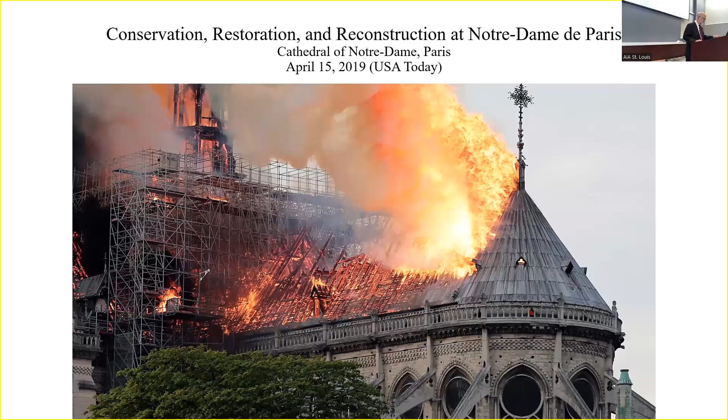Those who work in the field of restoration or rehabilitation of historic structures know that a building is at its most vulnerable precisely when there is construction work going on inside. To the danger of fire, we can add earthquake, flood, subsidence, structural failure, war, not to mention intentional demolition, adding those to the list of hazards faced by historic buildings. In many of these cases, the question of how or if the building should be repaired, restored, or reconstructed becomes difficult to answer quickly or simply.

In the case of Notre Dame, the damage at first appeared catastrophic, including the complete destruction of the medieval timber framing supporting the roof, a structure so dense it was called La Forêt, the forest. Its charred remains and those of the burned flèche or spire rained down into the nave of the cathedral through the partially collapsed vaults over the crossing.

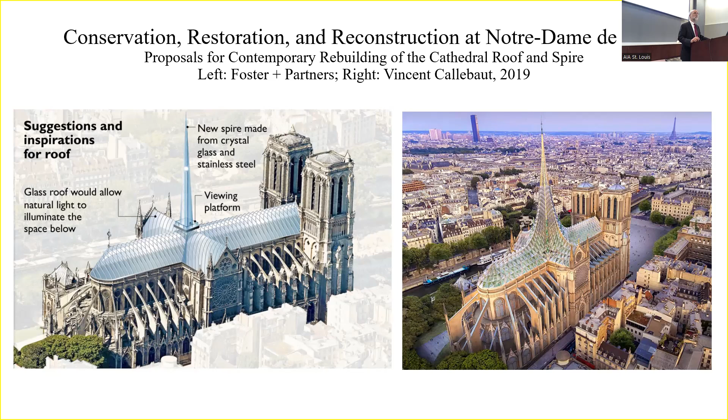But there were also other voices, such as those of Ronaldo Hernandez, Jacques Levet Jr., and René Salas, three former students at the University of Notre Dame, who proposed precisely what the contemporary architects claimed was impossible: reconstructing the timber roof of the cathedral, rebuilding its spire, and restoring the rest of the structure, constructing a temporary cathedral to house the religious activities while the work was going on, and at the same time, using the project as an opportunity to establish an expanded training program for craftsmen in timber, masonry, metalwork, glass, and other crafts and trades in need of recuperation.

These young designers maintained that the knowledge and skills needed to restore the cathedral existed and could be transmitted to others, and by this transmission could ensure the survival of both the physical artifact and the traditional crafts and trades that made our historic monuments possible and continue to maintain them today.

While that proposal remained on paper, another group, Professor Tonya Ohnstad's students at Catholic University of America, which she will talk about in a few minutes, went a step further, proving with their own hands that not only is the material needed to reconstruct the timber roof structure of the cathedral available, but the components of the old roof could be remade even by a team of architecture students under the guidance of trained and experienced timber framers. They proved that mainstream architects and conservation experts were wrong. Reconstruction of the timber roof of the cathedral was not only possible, it was within reach.

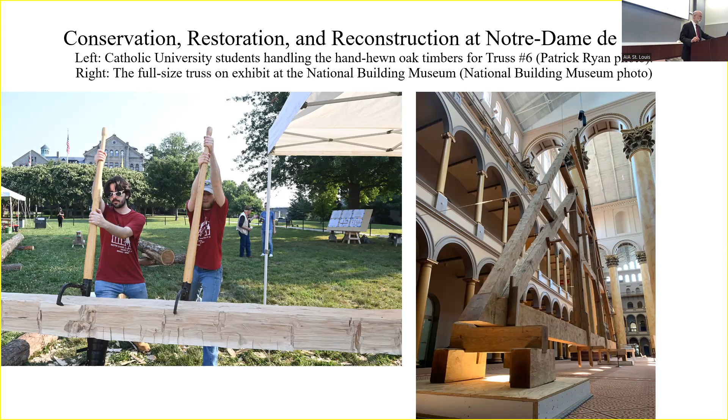Now, the French government is pursuing this alternative under the guidance of architects Philippe Villeneuve, Rémi Fromont, and their team. These two architects toured the United States at the end of September, and they spoke at both of our universities on successive nights. It was a tough schedule. Inspiring their audiences with their determination to restore the cathedral as it was, bolstered by the knowledge that they bring to the task. I believe this is one of the most hopeful things happening in the world today, which I think we can all agree could use more things to be hopeful about.

Perhaps we should not be so surprised that the means and the will are still available to restitute the cathedral as it was before the fire. For decades, international conservation pronouncements have called for the safeguarding of not only the physical artifacts of historic buildings, urban districts, and landscapes, but the knowledge, skills, and craftsmanship that made them possible, as well as their maintenance and preservation.

Comprehensive conservation of what we now call intangible heritage is the necessary antidote to the contemporary tendency to assume that only technological innovation can solve our present problems. On the contrary, both are needed, and their synergy is likely to be far more productive than either approach alone.

Contrary to conventional opinion, architectural craftsmanship and restoration skills have not disappeared, especially in France, where the traditional training and guild institutions established since the Middle Ages continue today in the Compagnonnage du Devoir, a national training program that follows the traditional path from apprentice to journeyman to master.

The craftspeople have always been there. We just need to identify and employ them and encourage them to train those who can follow them. If we do so, not only will we have the people we need, but more will join the cause when they see that such work is valued and supported.

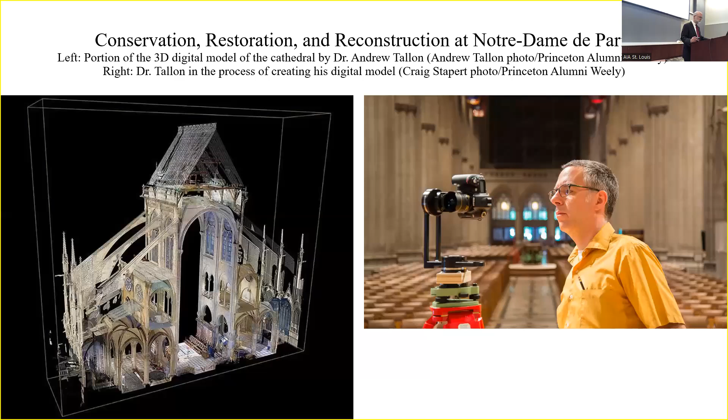As I mentioned, this is a project that demands both tradition and technology in equal measure. We need timber framers who can reproduce the forest of the roof structure, and masons who know how to cut and place stones to form a vault or a flying buttress. At the same time, the project requires conservation specialists who know how to use digital platforms to run the calculations and control the fabrication of temporary supports and permanent inserted materials.

In what some regard as a miraculous strike of good fortune, the cathedral had been the subject of a complete 3D digital model by Vassar College architectural historian Dr. Andrew Tallon just a few years ago. Using still photography as well as laser scanning techniques, he constructed an archive of visual documentation that allows confident restoration and reconstruction of most of the damaged portions of the building. A fitting tribute to Dr. Tallon, who sadly died shortly before the fire. I can't help thinking, well, maybe it's not so sad that he died before the fire, but at any rate, it's a tribute to the work that he did.

So this combination of high technology and medieval craftsmanship is what I find the most interesting about the project, and Tonya will talk about this further. This whole process perfectly illustrates a combination of medieval and modern, something that Eugène Emmanuel Viollet-le-Duc understood, because his work at the cathedral in the mid-19th century was also a hybrid. His spire, designed to harmonize with and complete the medieval cathedral, was a marvel of 19th century art and engineering. His timbers were not hand-hewn, but machine cut and finished, taking full advantage of the technology of his day.

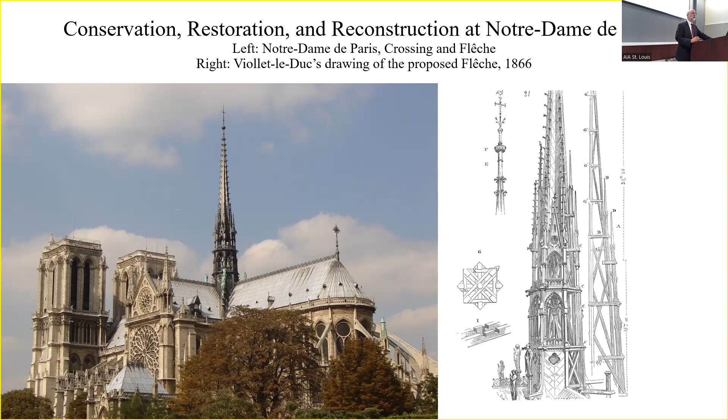In response to pressure from contemporary architects and cultural figures to introduce new forms and materials in response to the losses, architects Villeneuve and Fromont made the same argument that Gustavo Giovannoni had made in the first half of the 20th century. Giovannoni is perhaps not familiar to many of you, but he was one of the leaders of the conservation movement in the 20th century and probably the leading figure in Italy for that period.

In his 1945 book, The Restoration of Monuments, he wrote, quote, "Limiting the work of reinforcement to the minimum necessary leads to utilizing, without altering, the bearing capacities that have developed in the statics of the building over time, as distinct from the original structural conception.

This concerns the precarious states of equilibrium with which a structure can spontaneously defend itself, but that last for centuries due to the countering and integrating forces within the masonry structure. To disturb those states and introduce a different system of actions sometimes makes it necessary to rebuild everything.

So you see what he's saying. We need to understand that masonry structures are kind of like organisms. They behave in ways that are sometimes difficult to calculate. But if we're going to work with them, we have to understand them in ways that perhaps we haven't understood until recently, or that we have understood until recently, but maybe no longer tend to do.

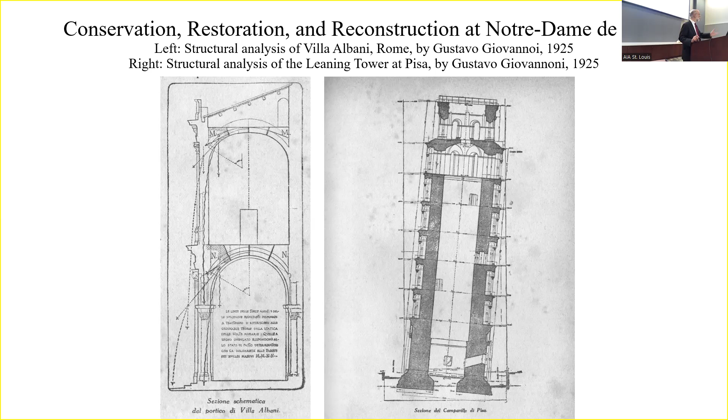But it's difficult to calculate this kind of natural equilibrium, and building codes on the whole do not recognize this kind of analysis. An important subject of research is how we might modify codes to take into consideration structural behaviors in masonry systems over the long term. This is really something where our technology, I think, falls short, but it's an area, an avenue where we could, in fact, advance if we set our minds to it.

At Notre Dame, each part, each stone has a role in this highly dynamic and interactive structure with its complex balances. Remove a load or add a new one, and that equilibrium is altered in ways we may not be able to predict. Should the timber structure be replaced with a metal and glass one?

Should the load be increased by groves of trees or pools of water, as some proposals suggested? It would be difficult to engineer the total building without adding potentially invasive new structural members.

The only way, the architects argued, that we can predict with confidence that the masonry structure of the cathedral might last another 800 years would be to put everything back the way it was, reestablishing the equilibrium the structure had achieved prior to the fire.

In this way, the architects bypass the cultural and stylistic arguments and make a pragmatic appeal on the basis of engineering. It was this technical argument, not one based on style or what is the architecture of our time and all of those questions. It was this technical engineering argument that convinced President Macron and other authorities that restoration and reconstruction, not a reinvented new structure, was the appropriate approach.

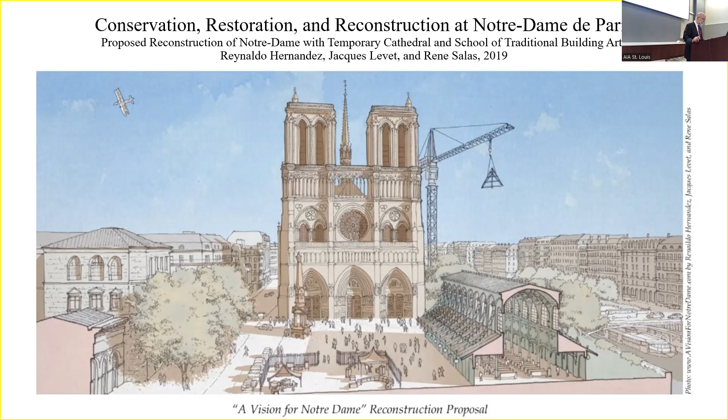Returning to Notre Dame, restoration will restitute the tangible heritage of the building itself, in the image we've had of it since the 19th century, when Viollet-le-Duc restored the cathedral from damage caused by the French Revolution and added the spire as a completion of the monument. But perhaps even more significantly, the restoration will reinforce the importance of the intangible heritage that allows us to restore cathedrals, and build new ones, teaching us how to build sustainably once again.

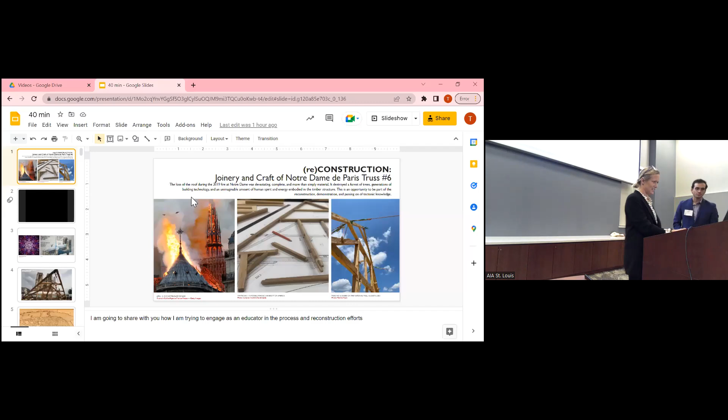Okay, no, you find your slide. That's a tough act to follow. Get this bar out of the way again. Sorry about that. Here we are, great. So, you're all really well—can you hear me in the back?

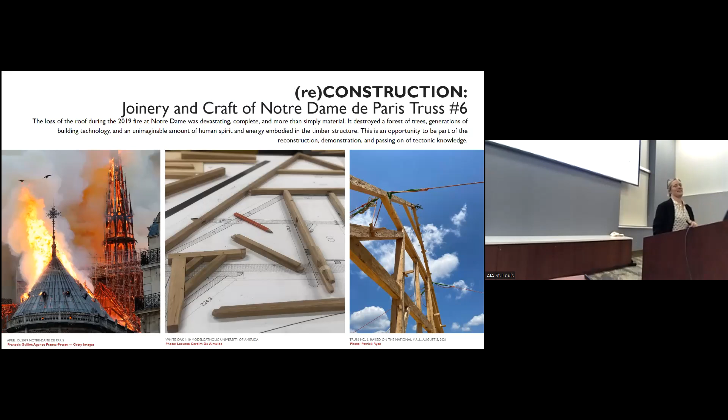Now you're all super well informed about the background, and I'm going to tell you a little about how I got myself involved in the reconstruction with a group of students. I remember it was during the darkest part of COVID, the winter of '21. I was approached by some people from Hands House, who are members of the Timber Framers Guild of America, a nonprofit educational group assembling a team of timber framers to rebuild one of the trusses. They asked if I could teach a class in parallel, and I thought this would be an incredible experience that tapped into a lot of my own interests.

They're also making a documentary about this, so I'll start with the preview for the documentary, then go through a slower version of everything we did, and end with images of the French architects who came, whom we had been waiting for a very long time. So I'll start with the video.

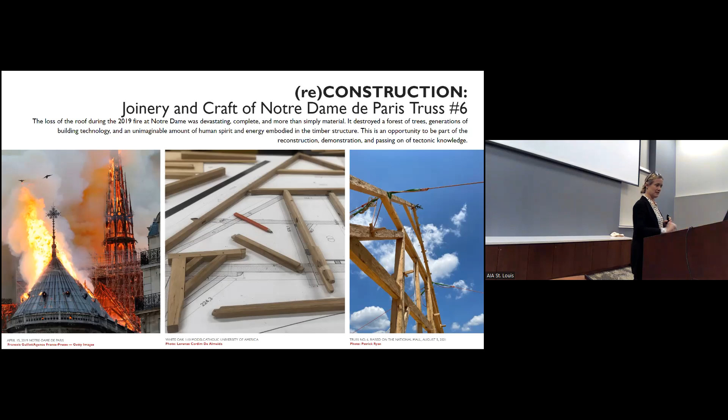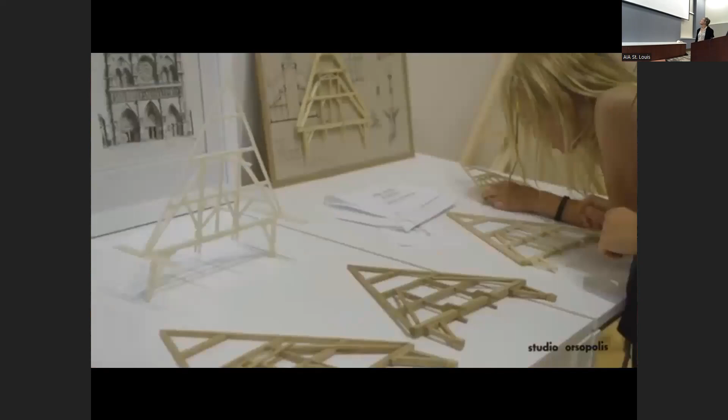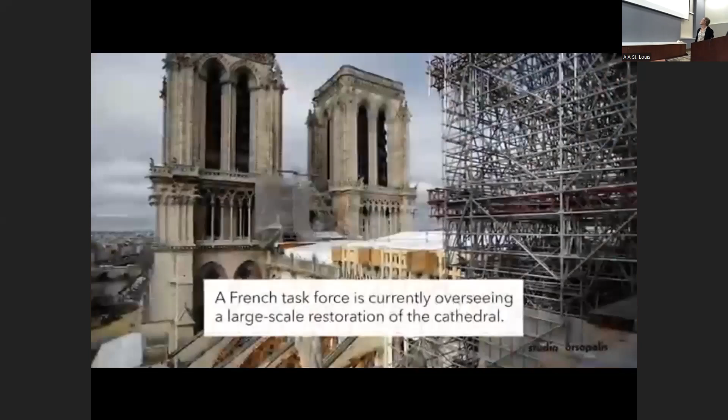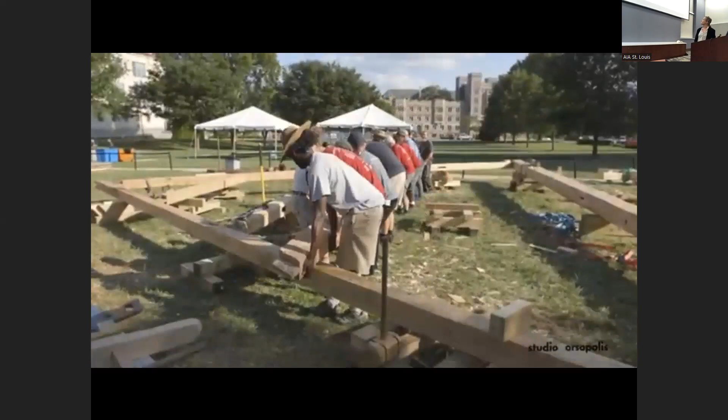People in shock, repeating it's gone, there's so much gone. If the roof goes, the whole structure is in jeopardy. Few people in the world know that above the vaulting is a wooden structure that actually supports the roof. People didn't know about it until it burned, because it was hidden—hidden under a lead roof, hidden up high. It's a triangle shape, and many are stacked together, going all the way down from the choir, across the transept, and across the nave. It took 1,300 trees. They call the roof structure La Forêt, the forest. It always amazes me that you get an acorn and it turns into this. We always start with an object—sometimes a very loaded object. In this case, a single truss that was part of the roof structure above the choir. Within that object is embedded the history, the context, so many things a human being brings to it at the time it was made. As makers, it's important to explore how it was made, who made it, why, with what tools, and to imagine remaking it. This is a perfect Hands House project. Hands House is a nonprofit educational organization; we focus on building large historic objects as educational projects. My goal is to celebrate the makers who made these originally, people forgotten. Your body's sore, your hands are bleeding, and you think, what am I doing here? Then you look up and everyone else is still working. But when you start to see how things come together, your hands gain a kind of intelligence, and you start to create your own reality. The history's gone unless we do this. It's not a job, it's a gift. I stopped work for two weeks to come do this. It's the glory of the process—hand to tool to mark to object. Getting to Notre Dame is their next step. It's a big shot, a big dream.

So that gives you the whole story, but I'm going to tell you the background, the rest of it.

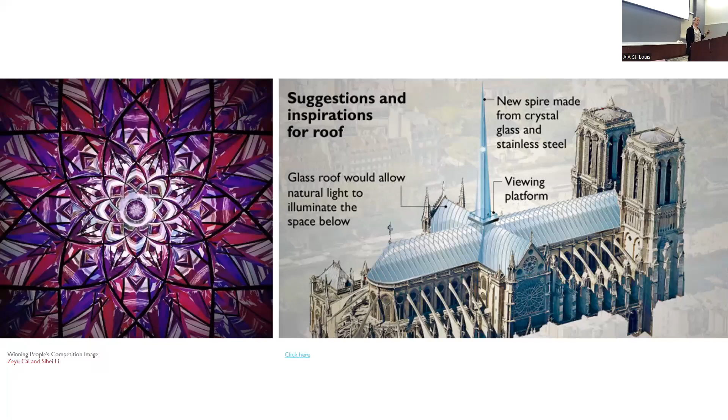As he was talking about, during this time there was a lot of conversation around if it should be modern or traditional. One of the first groups to make a demonstration was the Carpenters Without Borders, the Charpentiers Sans Frontières, and they built truss number 7. You're going to see this obsession over the different trusses, and they're really interesting because each of these primary trusses over the cathedral are actually pretty different, and they represent some learning over time.

Like Steve was talking about, there's a difference in terms of the way they're made. So Carpenters Without Borders built truss number 7, and in that they learned a lot of things. When the American contingency wanted to build a truss, they suggested truss number 6, because then you'll learn different things, right? This one was over the choir and ours was over the nave.

What we were kind of assigned by Remy and Carpenters Without Borders was something completely done by hand, a hand-hewn project.

We started — so the class that I taught, there's only so much you can do in the summer, and one of the things I really wanted to do was scaffold the students. I think this may resonate with some people, but especially during COVID, there's just so much out there — so many videos, so much internet, so much information. I thought, how am I going to teach a group of internet-savvy students an entire class about one truss, one triangle? How do we make that interesting?

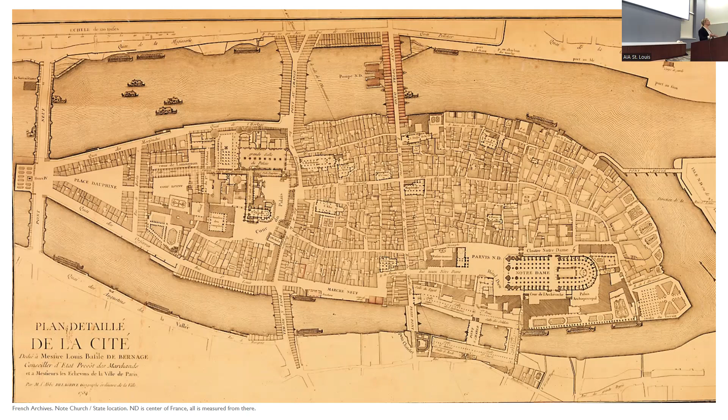We started with multiple architectural historians to talk about Gothic architecture, to talk about Lindsay Cook, who lives and breathes this — she actually worked with Andrew Tallon on Notre Dame, and talked specifically about Notre Dame and the construction methods.

So we talked about a lot of things at the same time as making. This is actually Andrew Tallon's book, translated by Dr. Cook, who's been a collaborator from the beginning.

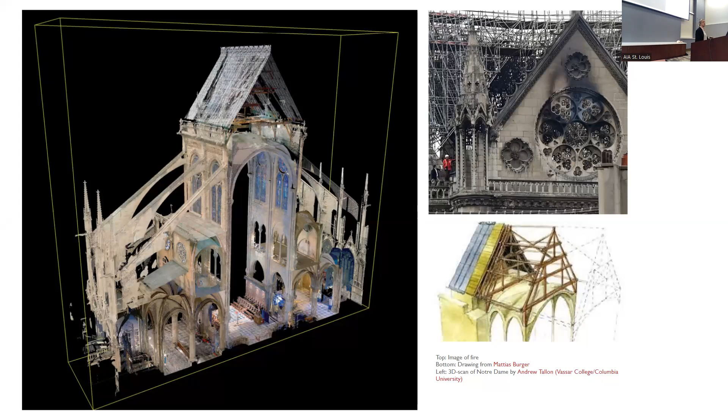Some of these original images, it wasn't really imagined that they would be useful in terms of scanning the trusses, but lo and behold, they were very, very important. So here are just some more images of these trusses.

Another thing to think about: Rémi Fromont — there are actually three architects, but two main ones. Rémi Fromont was brought in after the fire because his thesis in preservation was really about mapping all of Notre Dame. He spent months upstairs in the forest just drawing everything.

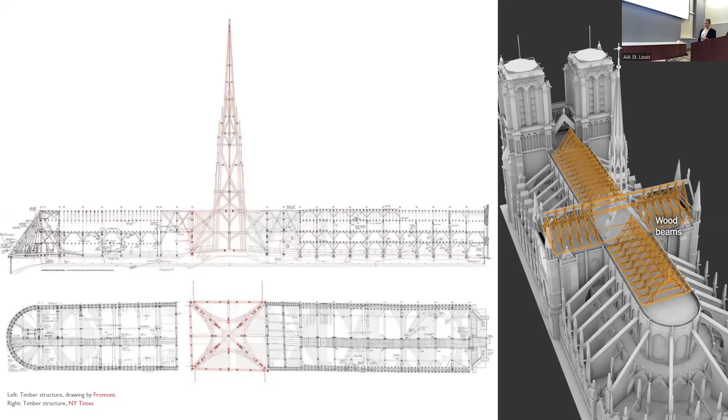These are some of his drawings on the left, and you can see the Viollet-le-Duc portion, and then some of the older trusses. So what you see here are his drawings — he had his original drawings.

So I gave students a pack of his drawings and said, okay, let's figure out what this truss is. The image below is the AutoCAD version from Carpenters Without Borders.

What's amazing is Remy's entire career was born out of these drawings, and students are drawing less and less in school. To see and understand how this can really shift and make a career has been, I think, important for many students.

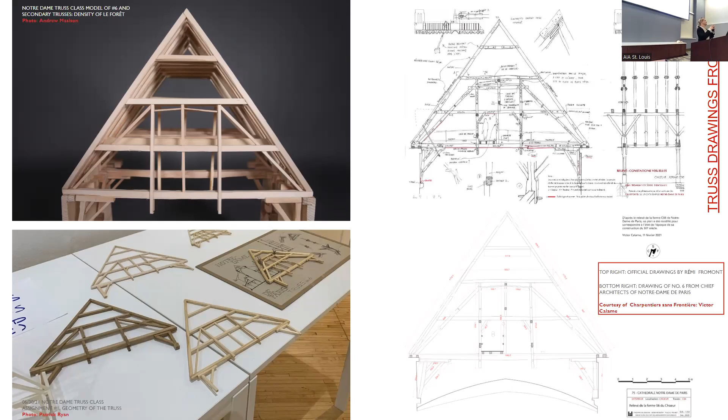So we started by just looking at those drawings, trying to understand them. They seemed simple enough, but it took some time. They then started to make, just to figure out the geometries, by making simple models — say 1 to 50 or something — and 3D printing them to try to get an understanding. But none of these models actually had any understanding of the way the joinery works.

So we started to look at how that joinery works. While they were felling trees in the medieval method, we were getting white oak.

Most students, of course, are using basswood, which has material properties very different than what was actually being used historically. So we used white oak for the model at a 1 to 10 scale.

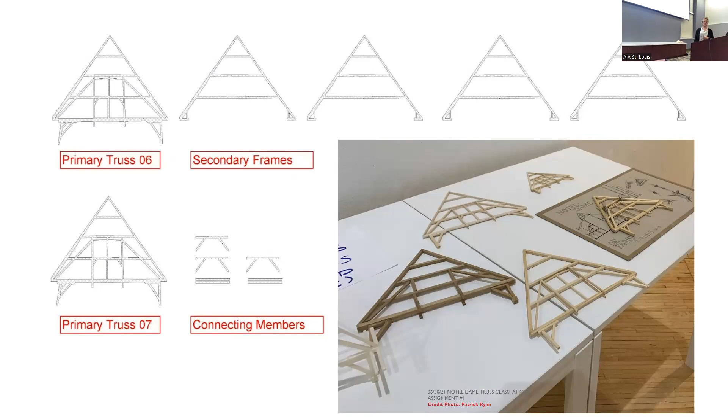So we started to look at all these frames, the primary trusses. One thing to know is there are these primary trusses—number 7 is the one the French did, and number 6 is what we were doing. And then there's a set of secondary trusses.

So they made these models at a small scale to figure out the way it worked. They put them together and started to figure out the joinery. I don't know if any of you did this in school, but I never learned anything about joinery in school. Just understanding that—even more simply—this triangle is put together by just a few different techniques starts to help you understand structures and very simple tectonics.

So they worked to make this kind of joinery themselves, you can see through these. We had some white oak, which is actually expensive, so for the model we had to plan out all the little pieces before they could master that first. So they worked on the joinery.

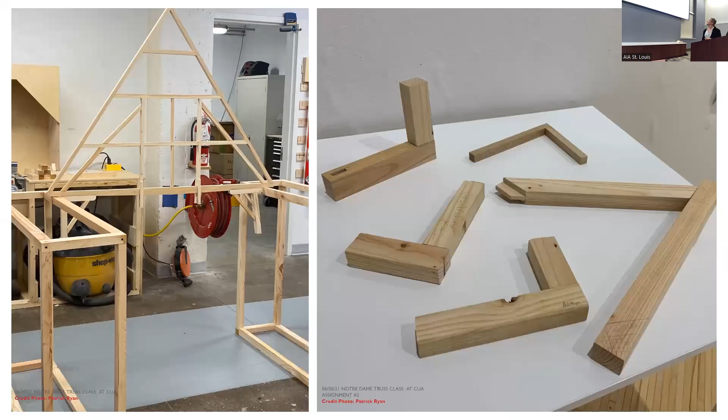We made a sample of the model in pine so that we would make sure we got to the 1 to 10 scale and would be ready. So we really worked through that.

One of the exciting things about collaborating across the country with an iconic building like this is that you get a lot of people interested. The students were motivated often by many interesting visits here. The president of the university came.

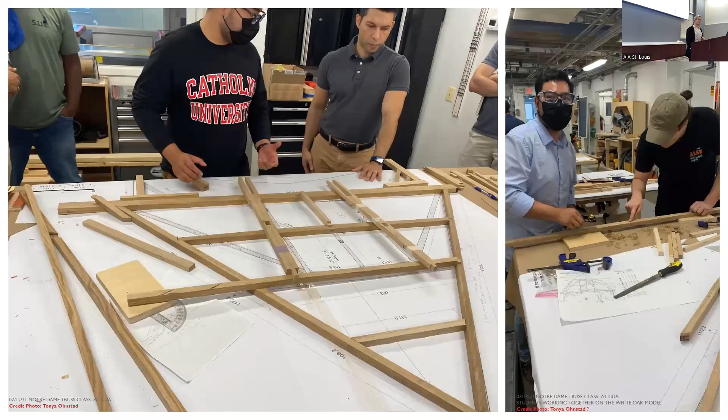So after we built these small models and understood joinery, we then went into the 1 to 10 scale. This is where the investment of time mattered—I wanted them to be as ready as possible, because at the end of 4 weeks they were going to get out on site, throw some axes, and make this at full scale. So we did a 1 to 10 scale model, and in that scale change they had to do all the right joinery, with assembly almost identical to full scale assembly.

So while these students weren't seasoned timber framers, they were learning how to assemble. I think it was a Thursday—I said, okay, everyone's been assigned a different piece, put it together. I'll see you on Tuesday.

They were like, there's no way we'll ever get this to go together, because they had to actually scribe the pieces just like in full scale. They had to assemble it, they had to figure out the order. It might have taken more than a couple days for them to figure it out, but they did. I think that created a community, and they also became really prepared for the assembly process.

So you can see here, we wanted to present the truss, but in our exhibition space it just seemed really lonely. So students got really busy making other kinds of objects to support it, and I think they were really excited that there was going to be a group of experienced timber framers coming.

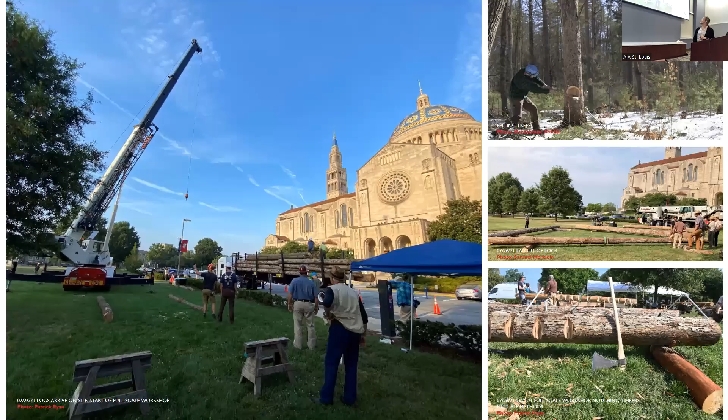This is the lead group of timber framers that arrived. The woman in blue is the project manager, and then there's 14 leads. And you can see they're filming. So this is the day that the timbers arrived on site. It was really exciting, 6 a.m.

Most of the trees came from Virginia, from a series of different private owners who donated trees. They were all felled by one person. Actually, it's really amazing, Mez Welsh felled them all, and they brought them. So here we had a crane on site. That was the last piece, luckily we didn't use ox carts or anything, but once they were on the ground, then we started immediately.

And so we had some pretty, like the video showed, timber framers from across America who were really excited to be part of this. Like, this was their vacation. They came and they taught our students how to do this, how to even turn raw timber into a usable material. So these beautiful shirts were also a way to show who's learning and who needs to have their eyes, who needs to be looked after.

Students very quickly moved from, of course it was so hot, these shirts didn't last long anyways, but they learned very quickly, and there was a lot of safety measures. So there was actually no accidents.

I still think this was an unbelievable leap of faith by my university to allow us to gather this many people and throw axes with my students. I thank you if anyone's out there listening. It was really amazing.

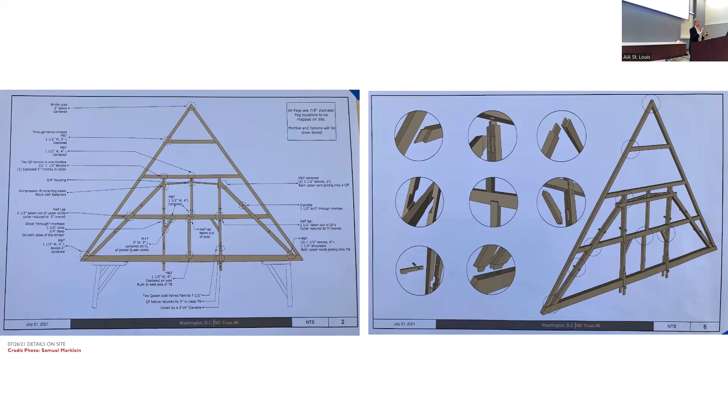These drawings were done by one of the lead timber framers. So you see, there's all these different kinds of drawings. There's Remy's original drawings. There's Carpenters Without Borders drawings. There's these drawings, which are trying to be as close to Remy's official drawings so that we could make a plan for what we were doing. And then there's yet a whole other set of drawings which had not yet been released, which were the official drawings, the tender that Notre Dame put out this last year for the reconstruction.

So this was our best guess before. The first thing we did, there's a lot of structures classes where no one's paying attention to their structures class. And then on the first or second day, a professor from VMI came.

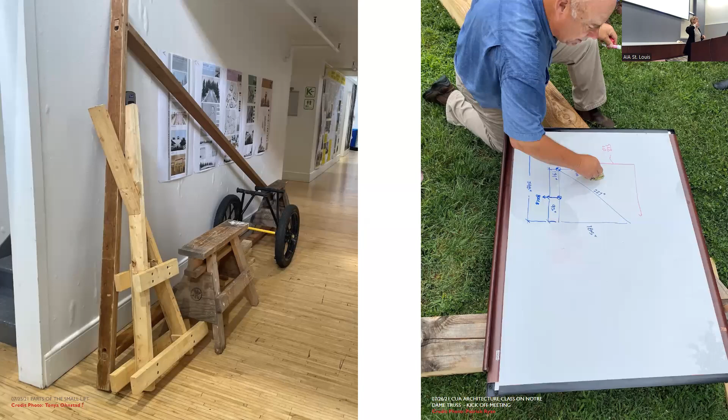Greg Mullen, excuse me, who was also the rigging master for the main lift, built a half-scale truss, and we spent the day trying to figure out the math. How much force does it actually take? And if we have more people, what does it actually take? So it was a little painful, but I think probably the best hands-on lesson the students had, trying to figure out the actual forces.

So this is the half-scale truss, and he had us figuring out how to lift the shear leg. This was a single shear leg. The full-scale truss had 2 shear legs.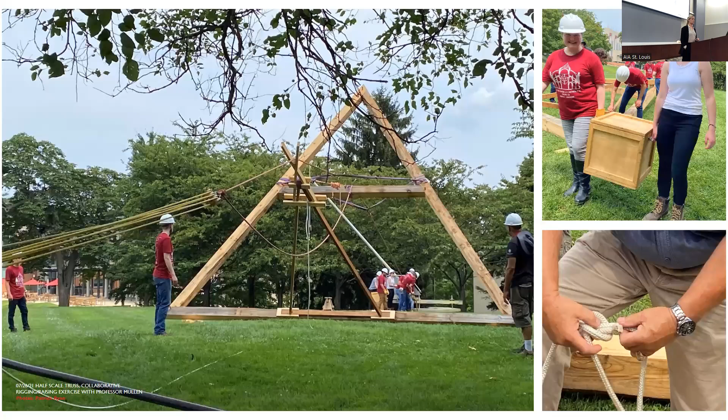And then having the students really be part of that rigging process, which is a whole other area that is not talked about. In fact, your image is kind of interesting because it shows a crane, and that's most likely what they'll do, but no one seems to know how they actually got those trusses up there. We had multiple historians, Remy, they don't know. It seems like they just don't know.

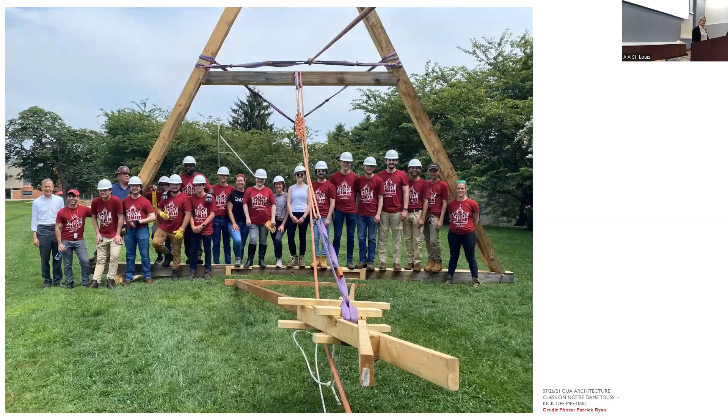So here we have lifted this half scale. One of the other things that happened was that the National Building Museum got really excited about this, and they came to visit multiple times, and they saw the student work. The original plan was really to just have the full scale truss at the National Building Museum.

But when the National Building Museum came, they were amazed at the work that was produced. So students started to produce more work, and they created an exhibition for the students that sat with the full scale truss.

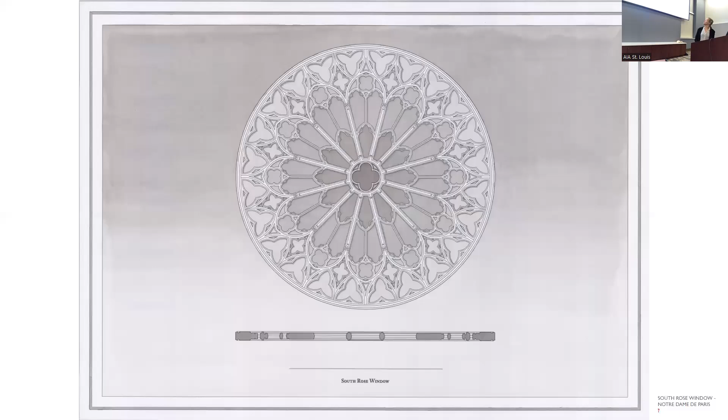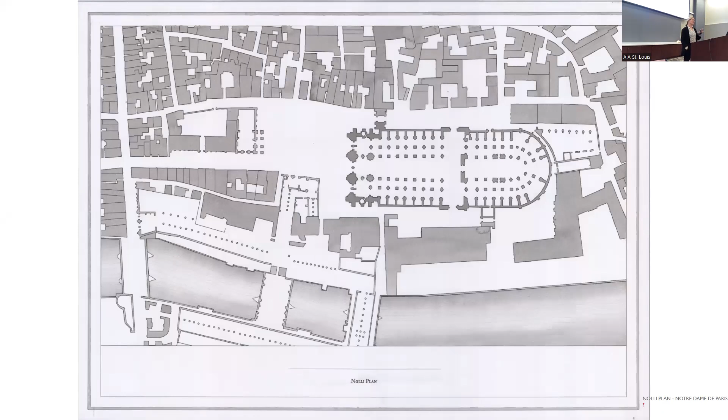Students made these beautiful ink washes of the cathedral, and I will show you some pictures later, but there was some really fun part where when the architect Philippe Villeneuve and Remy came, Remy spent a lot of time with the truss, but Philippe found all of the student errors, which I think was really kind of fun. You can see a picture of him.

Now we're getting a little bit into, maybe some of you already know all of this about timber framing, but some of the technical parts of hand hewn and timber work, and some of the different axes that we looked at.

So these are French axes, but when the timber framers arrived, there were over 200 axes that were on site. And all the students became drawn to different ones, and they learned how to use the axes, but also found their personality in them. We used all traditional tools.

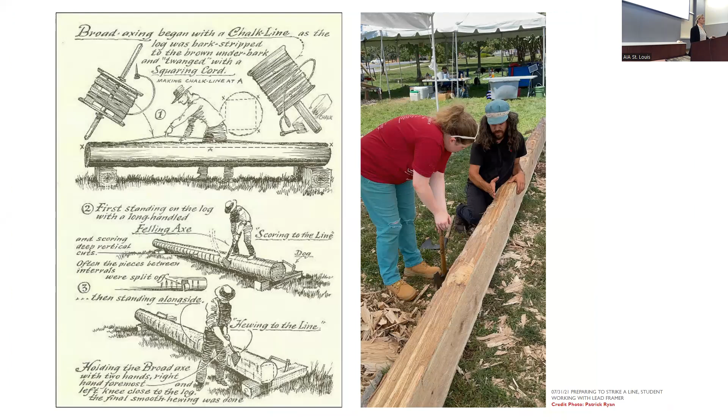So they went from debarking, you can see some of these, and followed all the methods in terms of scribing, dropping lines, snapping lines, and basically working through these chalk lines. And so one of the things that was really amazing was to see these really experienced timber framers teaching completely novice students from the beginning to the end. And in a very, very short amount of time, they took this on themselves. They did their own cord actually.

So you can see he was notching from above, but there were multiple very specific, different ways of notching. So there was a German way, and the same happened with hewing. So this kind of back and forth, this upper from below. Different styles of students, this was their cord that they took on.

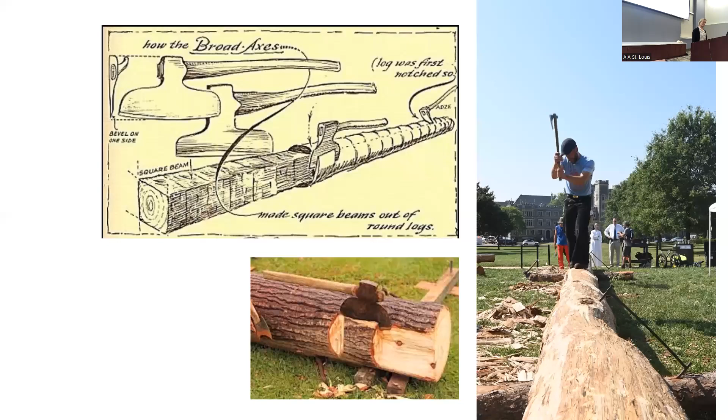Here's some more experienced framers. And here you can see they really went through this very regular process of notching and the different kinds of broad axes they used. And then they got into more finished hewing as they got closer, and that was also a process where literally their hands were held until the memory in their hands helped them move through a more complete or systematic way.

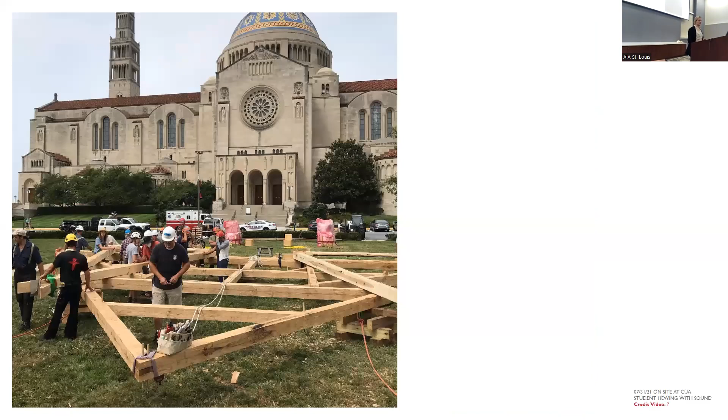There were framers from all around the country. That's a really short clip, I have a longer video later, but there was something really multi-sensory about the experience. It was hot, they were tired, they were motivated. There was a constant sound of the notching and hewing of the wood, but then you also heard the bells every 15 minutes since we were working at the base of the basilica, so you could hear time, you knew when the long break was, and you moved back in time.

You felt like this must have been what it felt like, along with these moments where a master hewer and apprentice were really working together. Lots of conversations, some about hewing, some about other things. It was really a lot of conversation. Here they were very careful about their cord.

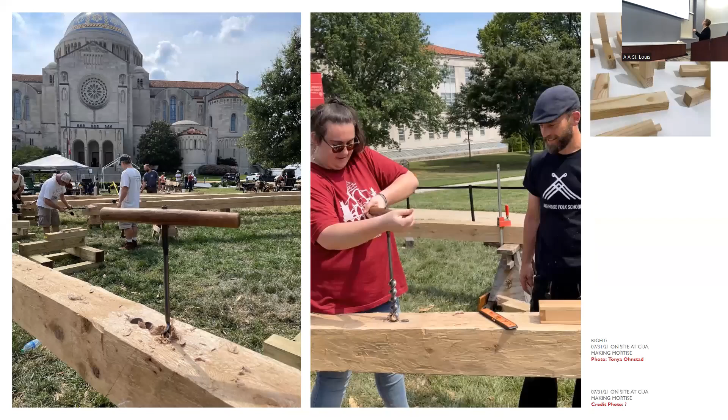This is a different version of the finishing. So the scribing was another thing that we did. So you can see the kind of joinery. We started by looking at this joinery at that scale. And there was quite a variation in terms of finish that students were able to do, but then the full scale version was very similar. So they got a chance to really see how to create.

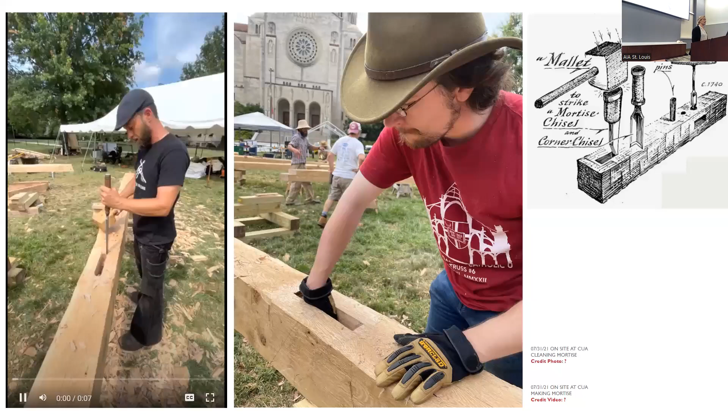And this guy actually was one of them, and he wore those hot corduroy pants the entire time. If anyone's met a Zimmermann, I think they're required to wear these pants. So he wore these no matter how hot it was. I don't know how he did it. Everyone who came on site was like, what's up with that guy's pants? And you had to explain, it's very important, Zimmermann. He's a great guy. He did the drawings too.

There was a lot of waste, quite a bit of waste. We filled 3 containers, and people came up and took pieces. The other part of the experience was that there's a religious community on the Catholic University campus. So there were many people that would stop and pray or stop and talk about the cathedral and their experiences. So the community was very much engaged.

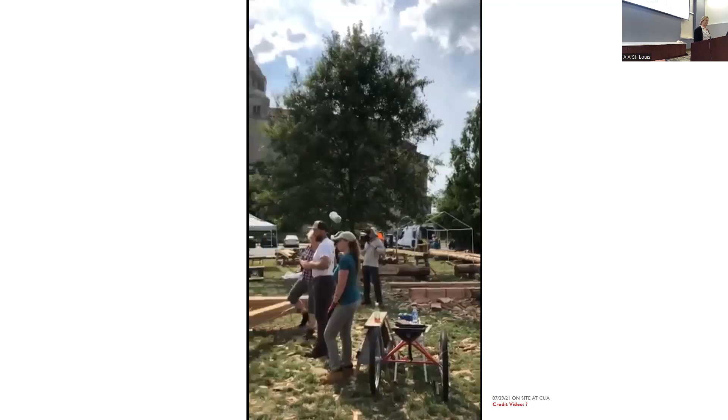This is just a view of the site. So you can see how it was really busy, really messy. Here we're starting to assemble it, but the scribing hasn't been done yet. So you'll start to see they put the members in, but they have to do them in a certain order. And at this point, all of the crews had been working separately, and now they're starting to come together and they have to start to collaborate.

We had also had the opportunity of North Bennett Street School, which is in Boston. They came down, and their students were working with us. Everyone was working together, but they also built, we had enough timbers to try to build a couple of other things that may have been used during the construction.

We're not totally sure about this, but we built a trestle with a pit saw. So typically it's like this, where someone stands above and someone stands below, but we built it as a trestle. It's a three-piece, sort of a tripod. And so it was kind of dangerous because you would stand where Michael is standing, he's the teacher, and you would split like that. And then when you get to the middle, then you would helicopter the log and do the other half.

So the thing that everyone's trying to figure out is, well, how was this made? How are these pieces made? And as you can imagine, a piece like that, that's sawn and then spun and done the same thing, you're going to have like a split in the middle, right? So if you're looking at these pieces, these trusses in Notre Dame, you can imagine, well, if you see a certain mark in a certain place, oh, hey, they must have done that.

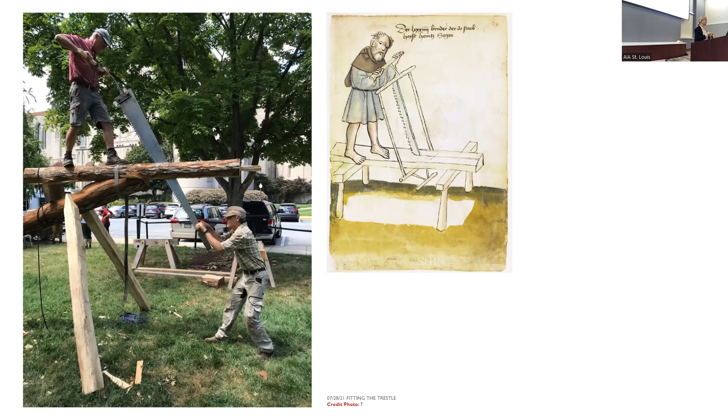So there's a lot of kind of reverse thinking, and actually a good amount of the timber that was burned, you can still see, in fact, some things that we never knew, like some of the pieces of joinery, which weren't scanned, it wasn't an X-ray, they were scanned from the outside or drawn from the outside. Some of those things became revealed. So here's some of the finished pieces.

We also made pegs, right? There's virtually no steel in any of the trusses, really, any metals; these were all put together by pegs. So we had a peg making factory, and it was actually kind of a nice place to be because it was in the shade. So we made a lot of pegs, and a lot of them broke. And actually these pegs were more sort of turnip shaped. They would have been more cylindrical, but because we knew we were taking it apart and putting it back together, we had to kind of make them more triangular.

Peg making. You might even see one of my kids in the background there, or two. I always enjoyed being at Heartwood and showing them the tie beam offcuts. That was Lorenzo, an artist and craftsperson who really helped the students along the way.

Did you make your own shaping horses? We did not, but I suspect they came from a lot of the different framers. So I guess I don't know. We didn't make them. We just used the ones that were there. That's a good question. Here we're working on scribing. So you start to see these different personalities coming together to figure out the pieces and how they go together.

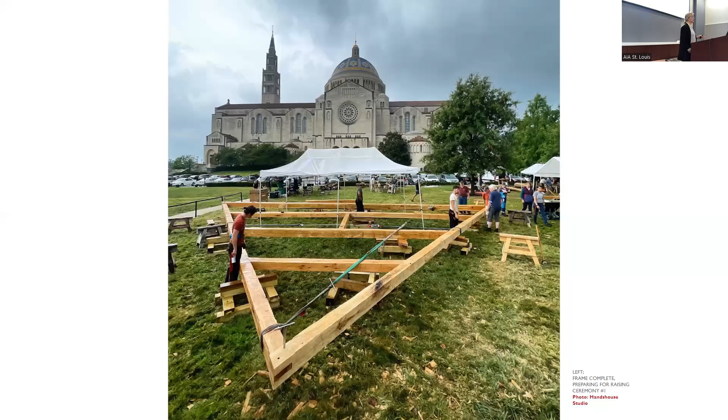I want to show you a quick video of the raising. So this is actually the second raising. We were poring over Remy's drawings for a very long time. Oh, I want the sound. I can turn this down. For a really long time. And so inviting the architects was an endeavor that took a year and a half before they were able to make it. And they didn't really want to leave until they felt.

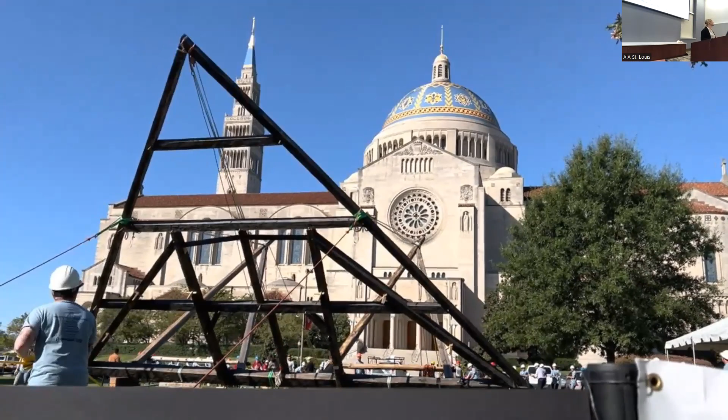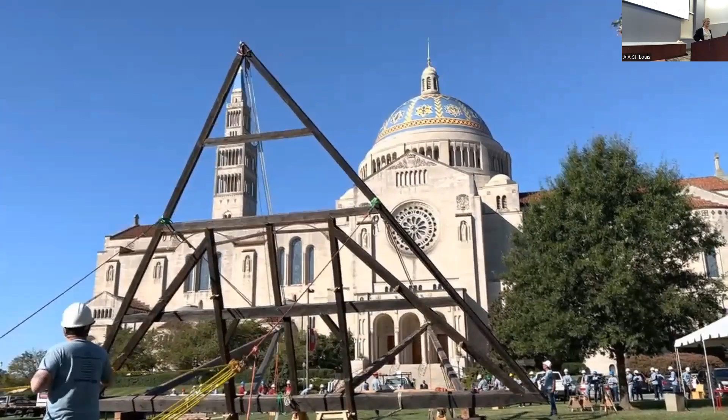So we put this back together and raised it so they would see the truss. Remy hadn't seen those drawings or this truss since before the fire. When he saw it, he was really moved, climbing it instantly, pointing out things, and I'll show you a picture. He really was glowing.

The hand raising is really significant. We did 3 raisings, and 2 of the 3 were done entirely by hand. The 3rd, at the National Building Museum, was done with a crane, and it was just so different and so fast, and didn't need a community.

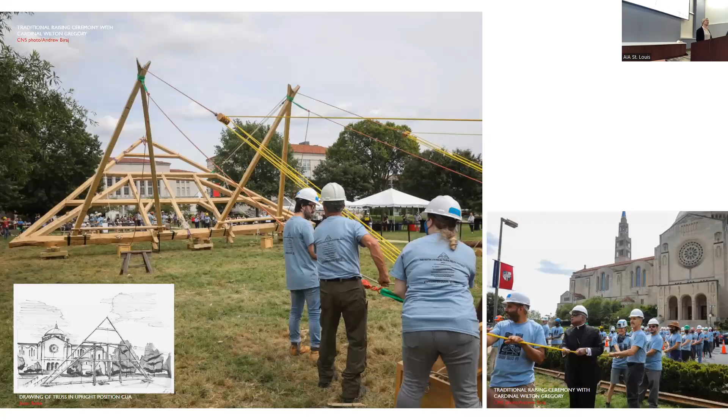So here are some images of the raising. The first raising was on campus. Cardinal Wilton Gregory came - he's also the chancellor of the university - so he came and blessed the truss and was part of the process.

Then a couple days later, we raised the truss on the National Mall. The timber framers were like, you're just supposed to put the truss together, put it where it belongs, and leave it there - you're not supposed to take it up and down - but they obliged and were helpful. So we raised it on the National Mall, which was an amazing experience to see the truss situated there.

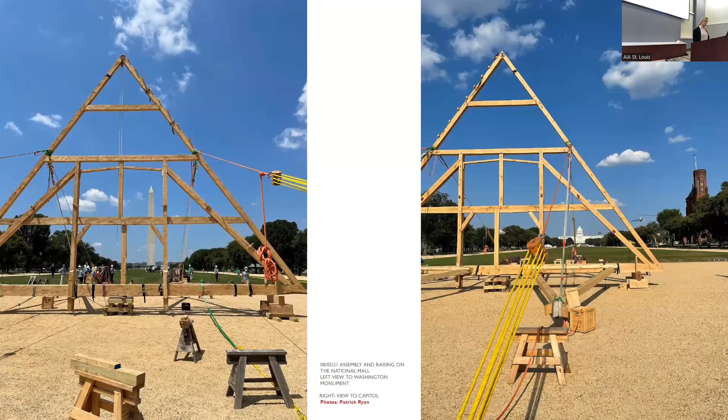A different kind of rigging experience - we weren't allowed to stake into the ground, so it required another level of thinking about the raising.

And then the 3rd - we've actually raised it a few more times - I'll show you a picture at the National Building Museum. Something happens when you finish a timber project: the youngest timber framer is elected to climb the truss and put a wetting bush on top of it. Luckily we had 3 different ones, and there were 3 different styles of climbing.

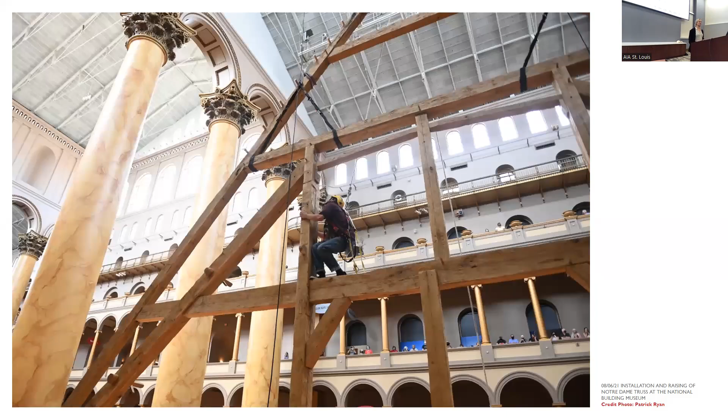The first one seemed pretty scared. The second one was showing off a little bit. Anyway, they climbed to the top of the truss and put up something green - I think eucalyptus, or maybe it's an evergreen. Someone's saying it's acacia. You guys already know.

This was the first thing the National Building Museum had after, or during, COVID, so they were kind of reopening a little bit.

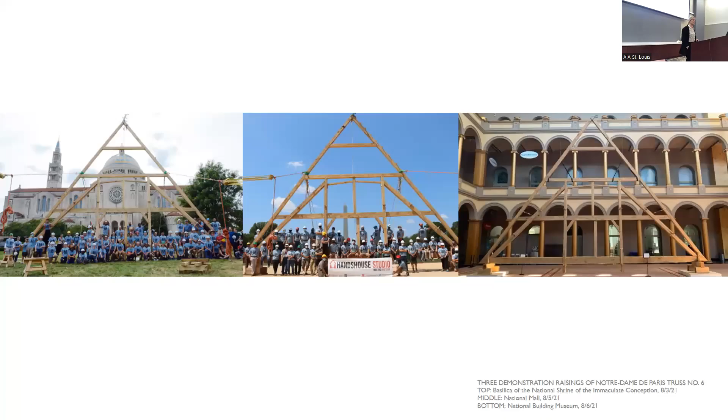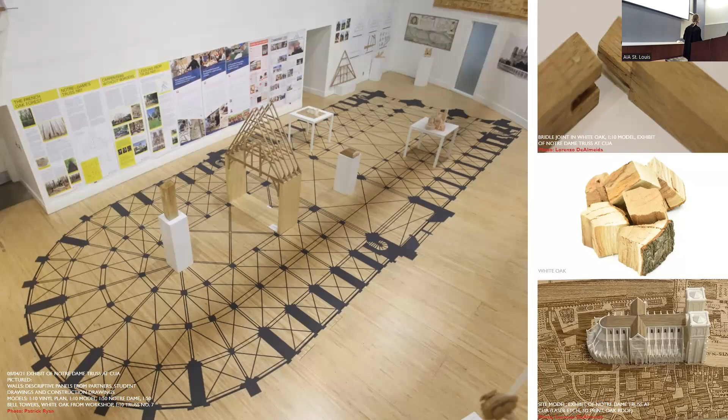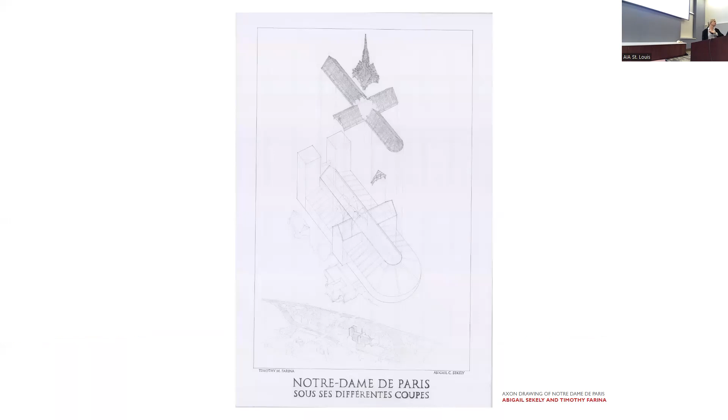The university was motivated, from the chancellor to anyone on campus across all the disciplines, and it was really amazing to see the amount of cross effort. In the middle of the day, the provost's office would deliver ice cream - it was just a really nice effort.

Students came every day bearing gifts - 'I couldn't sleep last night, so I drew this,' or 'I saw this picture in a book, I had to draw it again.' It was just phenomenal, the work and the drawings that they made.

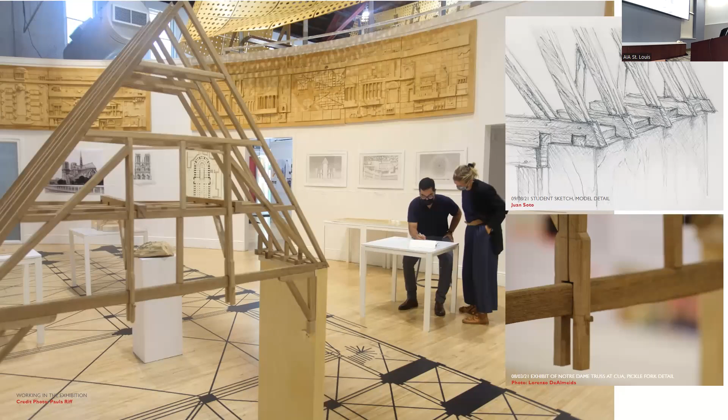This was one of our star students, Juan Soto, and the drawing.

The rector from Notre Dame Cathedral came and met with the cardinal, and there was an exchange involving American funds. You might know that the second biggest funder, after the French, are the Americans for the saving of Notre Dame. There are so many connections - we could probably talk for another hour about that.

We then took the truss to Atlanta, to Millennium Gate, along with all the student work. This is a funny place to exhibit student work, but it was kind of beautiful the way it was situated in a salon style. So we raised the truss in Atlanta last spring.

It's really been an effort for students to see how you exhibit similar work in different places. We hope to exhibit it in more places as well.

We've continued to work on the model that you saw from the 1 to 10 scale model, and I think that this model, we've continued to add to it.

We've started to think about other parts of the cathedral that are linked, like the water removal system. We've been able to work with Dr. Cook, who has access to the Andrew Tallon scan, giving us very precise scanned images so that we can craft other parts.

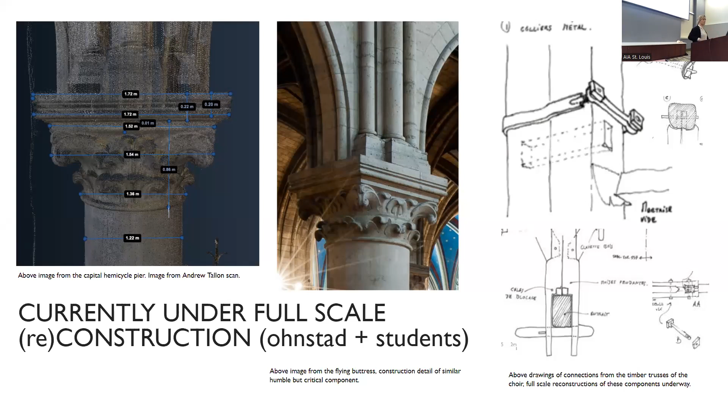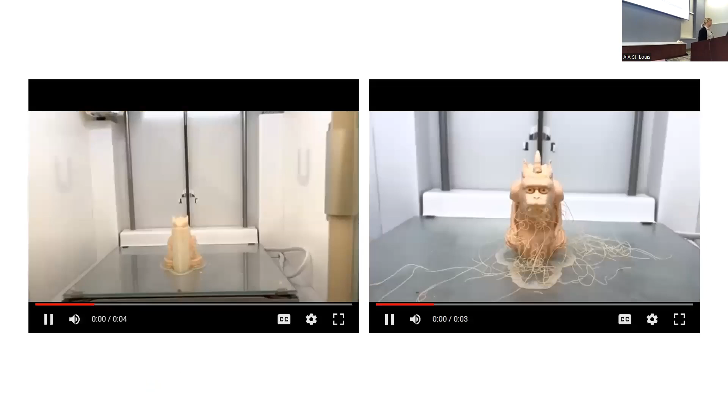So we've been working on another very interesting piece that also had to be restored because of water damage, at the same time as some of the trusses that Viollet-le-Duc had to restore with some of the water removal. We're looking at the gargoyles and the tops of the buttresses as another set of humble but really important elements.

That's great. Yes, so this is what you probably were all waiting for, or this is what I was waiting for a long time. Finally we waited a year and a half to get them, and then their flight was delayed a day.

And he came back after and spent almost the entire evening until like 1 or 2 in the morning, where I was finally like, you have to go home. You have to go to Notre Dame, they won't be happy if we send you too tired. But he came back and spent the night showing all the new drawings and answering every single specific question.

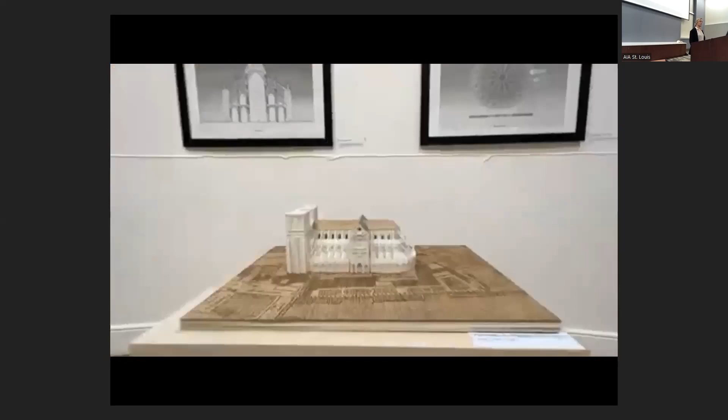A virtual visit of some of the 3D prints and early laser cut models.

One of the other parts of this exhibition is really to try to be hands-on so people get a chance to see how things get put together.

And then I will end with this picture, because for me, I feel like a forever student. I am learning so much as I'm teaching, and to see Philippe pick up the student model and find this isn't right over here, or this is missing over there, was not as embarrassing as it was exciting. To say, oh my gosh, there's nothing that beats a visit in person. All of these, even though we have access to all of these things, there's still nothing better than documenting in person. So that's it.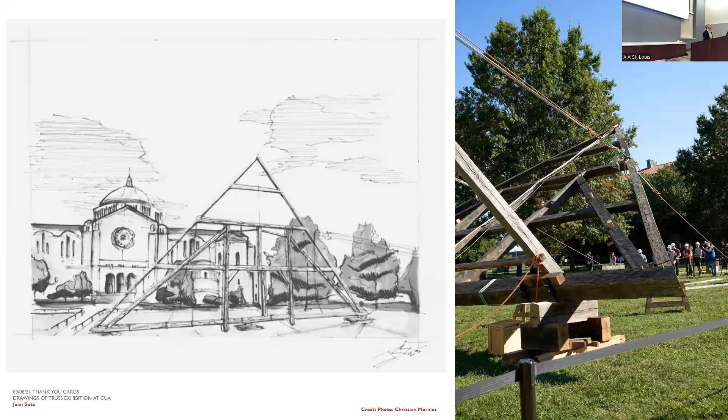Has there really been thought that they're going to build the structure using hand tools compared to just building with saws? Yeah, they're doing everything pre-Viollet-le-Duc by hand, and everything post-Viollet-le-Duc with machines. But there's something interesting they call 'tie mixed,' where even in the hand-hewn pieces, they take off a lot of the raw material but leave a couple inches around so they can do the finishing by hand. So it's a mix, but they're calling it traditional.

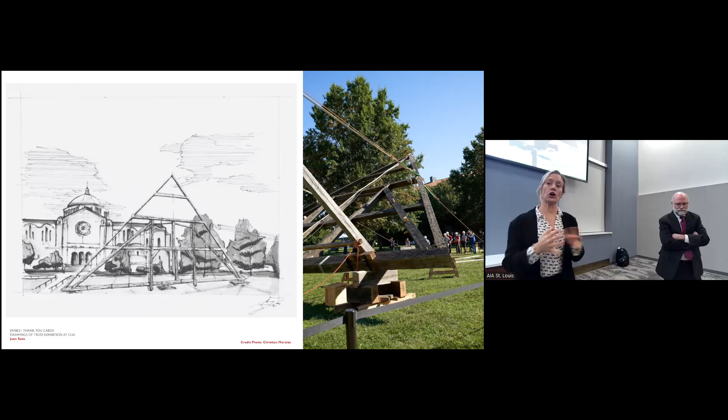So these logs were recently cut, I guess, but were they ever dry? How do they keep from splitting and warping? It's really interesting because the medieval method is that it would be done green, so you'd get a lot of juice—water everywhere. It's easier to manipulate when it's green. So they felled everything in the spring, and then the work was done in the summer.

And the current wood has all been felled and they're ready with it. There's actually a kind of interesting side story: the spire, for example, is emblematic—one of the most iconic pieces of the roof structure—and it will be made of wood from all over France. So they made sure to cover all of the regions. In fact, I think there's even some wood that they normally would not have accepted, but in the effort to include all of France, they took wood from everywhere. It becomes a sort of national work.

Yeah, the price of the wood is astronomical—some ridiculous amount, very high-end French wood. So they're not actually going to use the truss that you made? No. Oh, I thought everybody was making it. Yeah, the goal, the dream, was to send the truss. But what happened is the specifications for making the truss came out after we had already made ours, so we kind of knew that was an issue.

The wood has to come from a maintained forest, and we only have one maintained forest in the States that might meet the French criteria, which is Constitution Grove, not far from you. That was started by George Washington to maintain wood for the USS Constitution. But the very specific cellular structure of the American white oak and the French white oak isn't exactly the same, so it's not a perfect match.

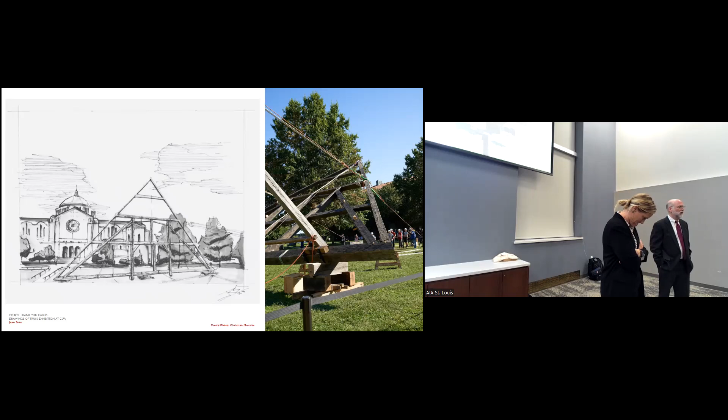It's like it's embedded in us. Another answer to that question is it depended on who you talk to, because our sources, people we've worked with, people who are in the field of actually making things, had a very different view of this than people who tended to sit in book-lined rooms and cogitate about it. Not a big surprise, so the people who actually had their hands on the topic were much more positive.

And so people like the compagnonnage, this is a program that's been going on continuously since the Middle Ages, so they are in fact in direct line. That's real intangible heritage when you have that kind of lineage, right?

So talk to people who actually do it for a living, and they'll tell you it's possible. I can't tell you the date the light went off, but that's what won the argument, because a lot of people had just assumed there are no craftsmen anymore. I hear that even today, I hear it from architects: 'Oh, I would love to do that, but there are no craftsmen.' Well, maybe if you specified ornament and decoration and craft, there would be craftsmen to do it. I've always found that they are available, you just have to look for them maybe.

This truss took us 10 days, which included one-on-one teaching for students. It would have been much faster if we just had them build it, and quite a bit less interesting, with no passing on of knowledge. So it just took 10 days. Actually, for the framers, this is just one truss, it wasn't really that complicated, the joinery wasn't crazy joinery. So for them it was really straightforward. It was just really hot.

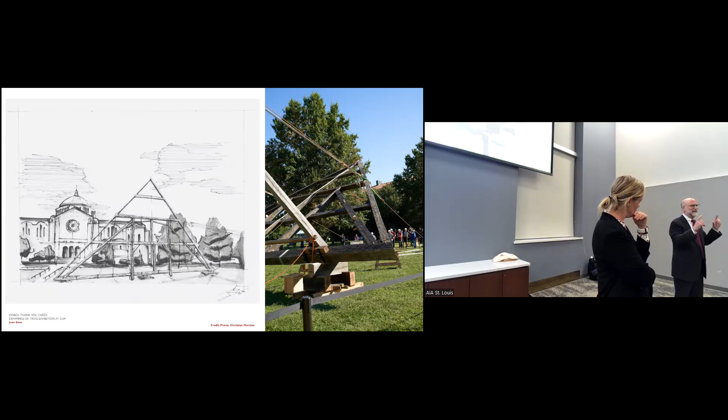So I think the answer is yes, they were really alarmed. They were worried, and you saw in the images those temporary wooden trusses that were installed to support the flying buttresses, for example. All the vaults, all the major transverse arches and so on had these temporary timber, industrially produced wooden trusses that were there as bracing, because they really didn't know. And of course, there were effects of heat, effects of water, effects of expansion and contraction, so there were a lot of things that would have and could have deformed the masonry. I'm sure there was some, but ultimately they were able to stabilize it in such a way that they felt more confident going forward.

So yeah, it's a great question. I don't have the precise answer, but that's the general one. We will handle it very well. And Sarah has a question.

Will there be any transparent fire treatment applied to the new trusses and spire?

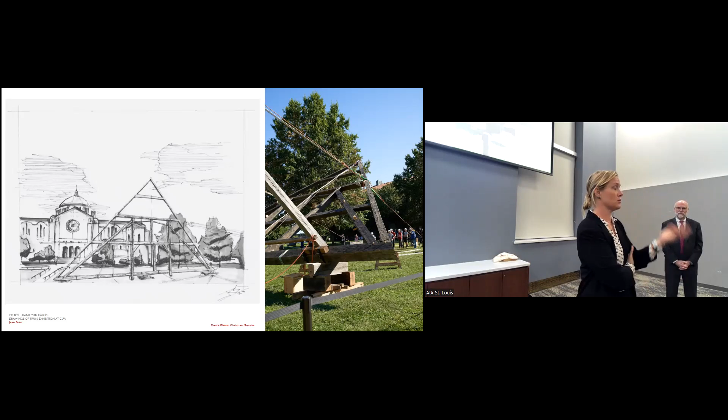I don't think, my understanding, and I could be wrong, is that it's going to be prevention, better sensors, but the last thing they want up there is water, because that will make it heavy and cause a lot of trouble, cause more problems. If there were an accidental alarm and the irrigation system goes off, you have a much bigger problem with all the timbers wet and the vaults wet.

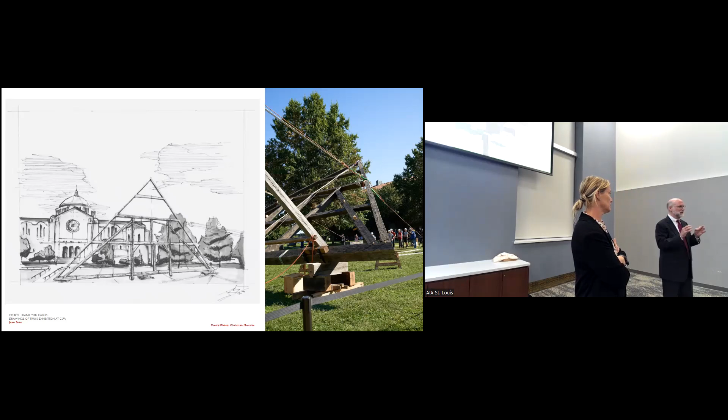If I understood, because this was a conversation after their lecture over dinner, and it wasn't possible to hear everything, but I understood, I think Philippe to say that there's a high-tech system. I know nothing about fire suppression systems, but apparently there's a system that is a kind of misting system instead of the old deluge, where they just have the sprinklers. It's something like those things you see in the summertime at outdoor cafes where it creates a mist, and the mist fills the airspace. It's not that the water puts out the fire, it's that the mist prevents the fire from having oxygen, so the fire doesn't grow. That's the way it was explained to me. So that sounds like a good system, because it's not going to saturate the timber with water, and it's not going to do damage by coming through, but it would prevent the spread of fire.

They may have also said something about some places where they would insert planes to separate different areas, but I'm not sure about that, I may not have understood that fully. It was half French, half English, and my French is not very good. But I did hear the part about the misting system, so that sounds very promising to me. I also was struck by the idea that they're not going to let any electrical wiring above the masonry vault. That sounds like a good idea to me.

As we finish that last answer, one more question: what will the new roofing material be?

I think they're going to reproduce the lead roof. Lead isn't used very often in roofing nowadays. What we tend to use as a substitute for that nowadays, as you probably know, is terne-coated stainless, which is often specified because it looks like lead. The patina is a kind of dull gray over time, which is how lead looks naturally. Lead, obviously being poisonous, is a problem, and in fact the fire created a serious health problem in Paris because the lead pulverized. It melted, but also pulverized, so the air was full of lead dust, which a million people or so were breathing. So that was a serious problem. But if it's stabilized, if it's not burning, if it stays put, it's perfectly safe. So my understanding is they're going to reproduce the roof as well.

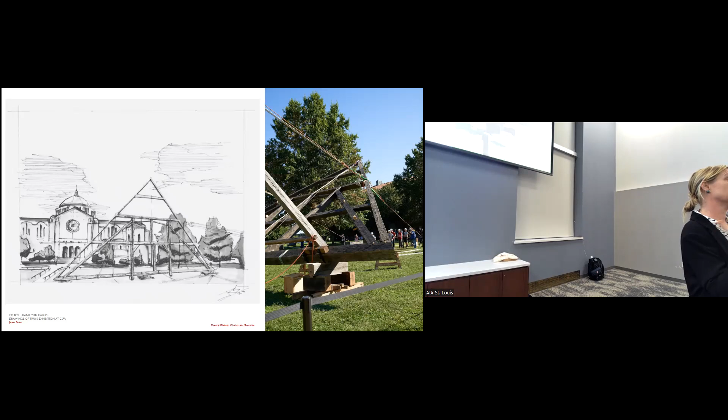And what I think is really interesting is what happens from the day before the fire, when some of the trusses have been fixed or reinforced in certain places. They're not remaking broken trusses and reinforcing them. They're making some decisions to make it better in real time. So if there are pieces that needed reinforcing, they're engineering it still. So there's reasonable reconstruction, I think is what they call it in French. There are some changes that they're making.

If you knew that some piece or some assembly was in fact problematic, you wouldn't reproduce it just for the sense of historical accuracy, right? So that's the reasonable reconstruction idea, that you reconstruct it within the brackets of functionality and not reproducing a problem. For example, since I mentioned the University of Virginia, the famous case there is Thomas Jefferson was absolutely the worst architect in the world when it came to roofs. All of his roofs leaked terribly.

When he first designed the buildings at UVA along the lawn, he had a system he invented of these odd little roofs that were lined with metal, and they never worked. So when they did the restoration, the question came up, should we reproduce these roofs that don't work? And they decided, no, let's actually put a roof on this building that will keep the water out.

Because that's also part of conservation, right, is survival. So I think there has to be some latitude in there.

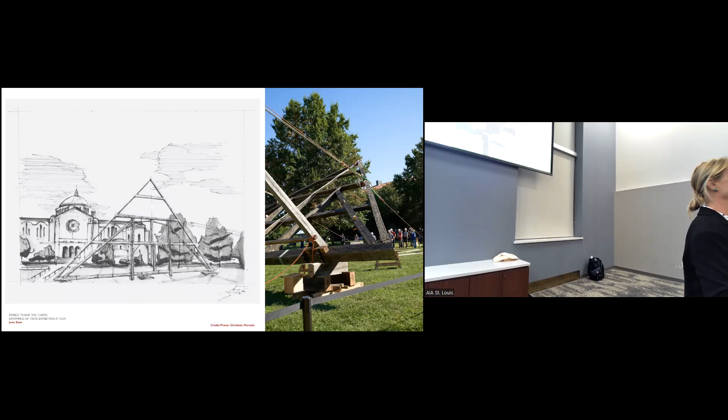There was just one last anecdote. After the architects of Notre Dame went to Notre Dame, they came back to DC and we did a kind of whirlwind tour of DC, and one of the places they spent the morning was at the cathedral. They had this really great interaction with the stonemason at the National Cathedral, and we got to climb on the roof. I was totally faced with my fear of heights, and we got to see some of the reconstruction and some of the new pointing, and we got to climb on the vaults. It was a really nice thing. I think the architects were really excited.

We also got to go inside the organ. Oh, wow. Incidentally, side note, Philippe loves organs. Philippe is an organist. He went crazy for it. That was just fantastic. It was a neat trip.

We know the time span for the original construction of the timber framing, of the roof framing for Notre Dame? I think Andrew Tallon's book goes over this and makes some conjectures. You can read that it was 200 years, but it's been like 900 years, or the book is actually called like 900 years of construction, because there's been construction and reconstruction. I meant just for the roof timbers themselves. Just the roof framing. How long did it take? Do we know how long that took?

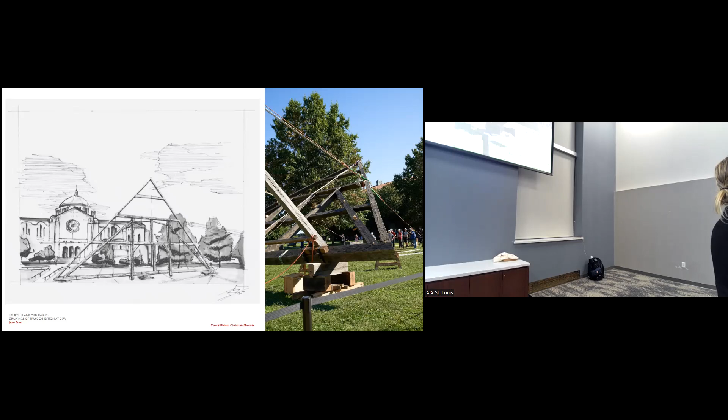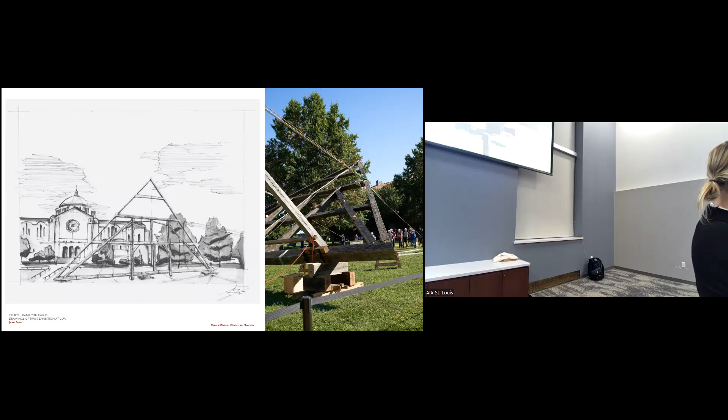Well, my understanding of the construction is that they started with the choir and then they had these additional pieces that took time. I think the overall construction was something like 200 years before the reconstruction from Viollet-le-Duc. But it wasn't continuous during that whole time. There were campaigns of building for the obvious reasons we have today, like funding, wars, other things that interrupted it. I'm sure there is some kind of documentation that would give us an idea. Most of the cathedrals, they started at the east end and then moved west. So there were times when the cathedral was sort of truncated compared to the way it is now.

You should look at the book Nine Centuries by Andrew Tallon. And Dr. Cook is the one who translated it. It has model reconstructions or conjectures of what it looked like at each stage. It's really interesting because you see the digital model and you believe it because you're used to seeing digital models of something you are working with. But these are conjectures of what they thought it was like. Right. Bill, do you have another question?

You talked about the architects of the past and how they put hand-drawn drawings together for the craftsmen to do what they do. If architects now were to do more of that, could there be the use of more craftsmanship? Obviously in Paris they have that. We don't have as much of that here in the US, but it's still here in many areas, and St. Louis has a vast amount of that history in buildings. So how would architects in St. Louis bring that back? Some are doing that, and it could even just be very modest things.